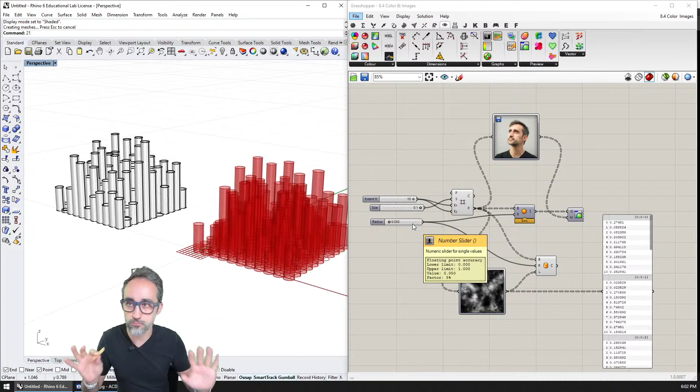Oh, sorry. I'm grabbing a snack. I haven't eaten in a long time. So, what am I going to do? We're going to record. Actually, this one doesn't need. Sorry, I'm just stuffing food in my mouth. Can you still hear me? Yeah. Sorry, I'm stuffing food in my mouth.

Give me 1 second. So first let me save this, and then let me close it, and then what we're going to do is... Okay. So what are we doing this afternoon again? We're streaming 3 times today. So I am going to do the 2 exercises that I'm missing that I want to wrap up for images, and then after that we're going to be done.

And then what I will do is offline I will prepare a small presentation, because tomorrow I want to record an introductory video like, hey, this is Introduction to Parametric Modeling. You're going to learn this and that. And for that I would like to have a video with small clips of interesting things that we did over the course of the playlist. So that is going to take me a little bit of time to prepare.

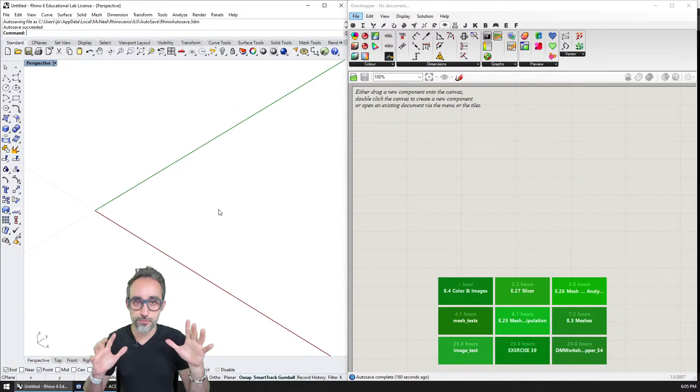Okay, so in the meantime, this afternoon, we are going to record the 2 videos that we have left, which is creating a pattern from an image. So that's going to be one thing. And the other one is going to be recreating a topography from an image. Okay, so how are we going to do that? I have the examples that I want to use here. Exactly. So, okay.

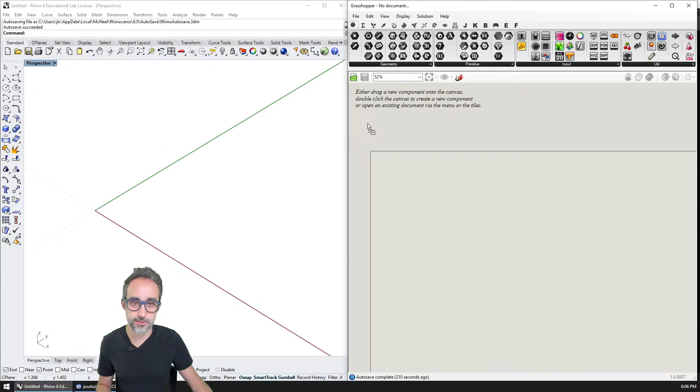All right, so for this one, I'm not even going to draw anything on the whiteboard because it's just going to be that easy. Okay. So let me put a slider here, and this is going to be grid size. That's going to be 10, for example, and then another. We're going to call this number of cells. Okay.

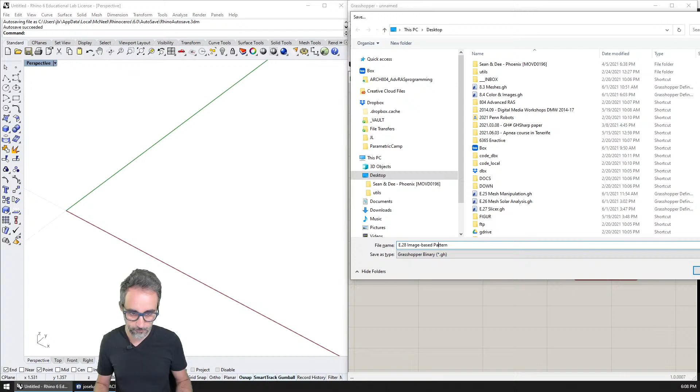E28 is going to be image based pattern. And then I will record the introduction later, but I'm going to start right away. Okay.

This exercise is going to be so easy that I'm not even going to do any sketching on the whiteboard. And you already saw in the introduction what the exercise is going to look like. So I'm just going to cut to the chase and start writing code. I have a couple of sliders here that I will use. And then I just dropped an image sampler from parameters, input, image sampler, which I'm going to extend to make a little bigger. Then I'm going to double click and load an image that I have here of myself.

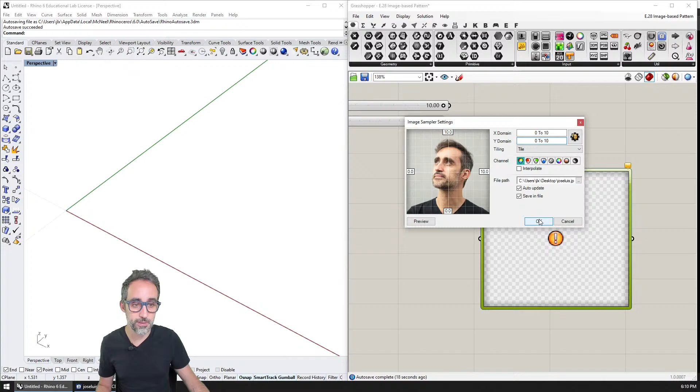Okay. In the previous video, we saw how by default the domain of the image is from 0 to 1. This I can change, so I can make it, for example, from 0 to 10, so that the image is a little bigger here on the Rhino viewport, if you will. And then what I can do as well is choose what it is that I want to output from the image sampler.

So right now we have RGB colors, but because I'm going to create patterns of circles that open bigger or smaller, I'm not going to use the RGB colors. I'm just going to use the intensity, so how bright a particular pixel is going to be. And this will be a value from 0 to 1, with 1 being super bright and 0 being not so bright. Okay.

You see that the image sampler turns black and white because that's a more accurate representation of brightness. Okay. And I'm going to plug in here a panel to get a sense of what's going on. Now, what I would like to do is create a grid of points that I'm going to use to sample this image. So I need to create a grid of points that go from 0, 0 to 10, 10 at however much intervals.

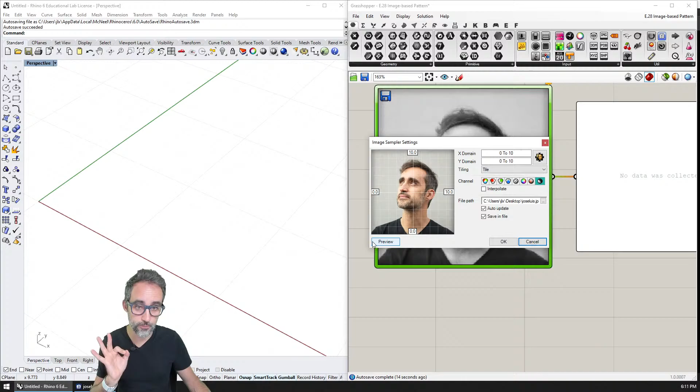And this is because the grid of points are going to be here physically in Rhino, but also it's important that those points have the same coordinate space as the image. So I'm going to create a grid of points that is going to be square. The base plane is going to be fine, and the size of the grid cell... how many points are on each direction will depend on my number of cells. So for example, I'm going to do 10.

And then the size of each cell will be equal to the size of the whole thing, which we agreed was going to be 10 units, divided by how many cells I have in each direction. So that's why I need to do a division where I divide the total size of the grid by the amount of elements, and that will give me the size of each one of the grid cells. And therefore, if I have more cells, they are smaller, but if I have less cells, they are bigger. Okay?

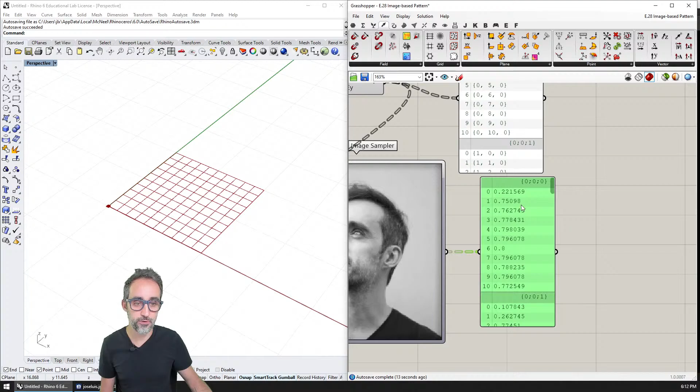Right, so now I have here a collection of points. Those points have coordinates in world coordinates, 0, 1, whatever. But I don't care about world coordinates. I care that the domain space of those points is going to be similar to the one in the image. So from 0 to 10, my image is also sampled from 0 to 10. And therefore, now each one of those points has a value for the brightness. You can see that some points have low brightness and other points have high brightness.

And what I can do now is use those values to drive the dimension of a particular element. So for example, I'm going to turn this off, and I can use those to drive the dimension of particular elements, for example, a circle. If I drop a circle here and I choose all these vertices as the centers, and all these radii as the diameters, you can see that something is happening.

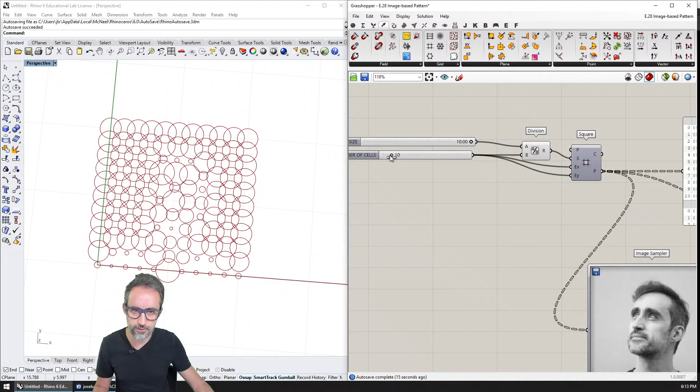I can see that more or less there is a sense of larger circles around and smaller circles here. And if I crank this up, it looks like there is some kind of pattern arising that looks like the image. So that is great, but because I'm using just the straight numbers 0 to 1 as the radii, this is not working entirely, because the circles should be smaller the more cells we have. So we need to multiply this 0 to 1 by the size of the cell so that the circle adapts to smaller cells or bigger cells.

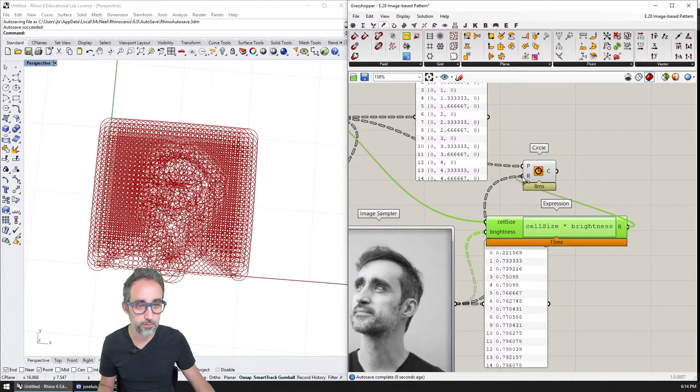So I'm going to add here an expression, and this is going to be cell size, and this is going to be brightness. The cell size is going to be here, and the brightness is going to be this one, and I'm just going to multiply the cell size by the brightness. As I plug this in here, it's starting to work, but you can see that there's overlaps. That's because we are using the radius, not the diameter. So we just need to multiply this by 0.5. And now we're getting something that looks much better.

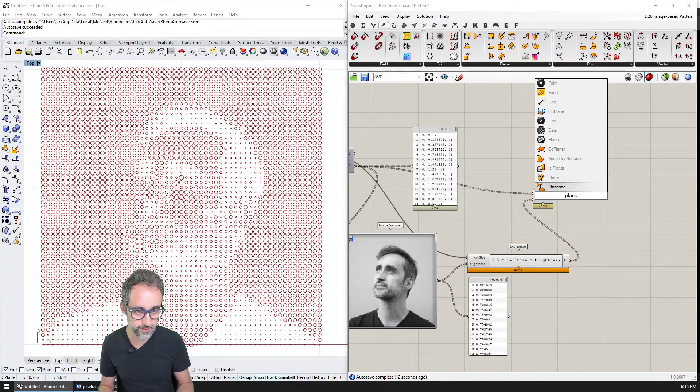All right. So we get larger circles where the area is brighter, and we get smaller circles where the area is dimmer, which could be a way to go as the pattern. And let me actually crank this up so that we have more definition. So this is starting to look pretty cool actually. But I would argue that if we do a planar surface, like a boundary surface, it's going to look even better. So it's going to look something like this, right?

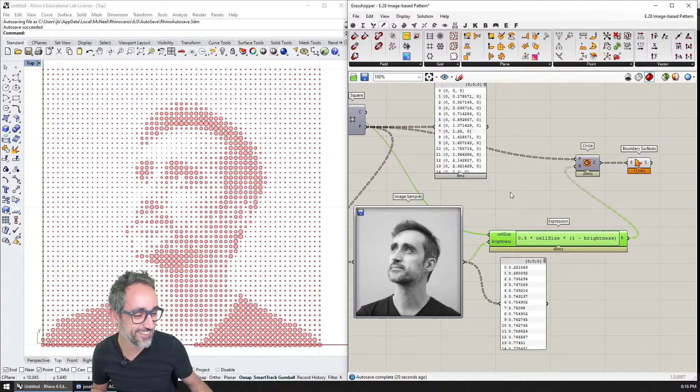However, I would argue that I kind of want the opposite effect. I want smaller circles where things are brighter, and I want bigger ones where the element is darker. So what we want is 1 minus the value of brightness, so that wherever we have a lot of brightness, the value is very small, and wherever we have tiny brightness, the value is bigger. And then I can do that, and you can see that now this is starting to look a little better.

By the way, I never gave credit. This image was taken by my friend Nono Martinez Alonso. So it's always good to give credit.

And something that I also want to try is to implement something where under a certain radius, under a certain size of pixels, we're just not going to take that into consideration. So if certain circles are smaller than a particular value, then just remove them completely from the list. Maybe I'm going to work directly here with the brightness. I'm going to take all the values for the brightness, and check if the value is over a particular threshold, or AKA, if the value is very, very bright.

So how do I do that? I can go to mathematical operators, and use a comparison operator that is called larger than. With larger than, I can compare if these values are larger than a particular value, for example, 0.9. The result of this is going to be a list of true and false values that tell me whether a particular number is greater or not. And with this list, I will be able to remove from this data tree any element that is false and keep any element that is true.

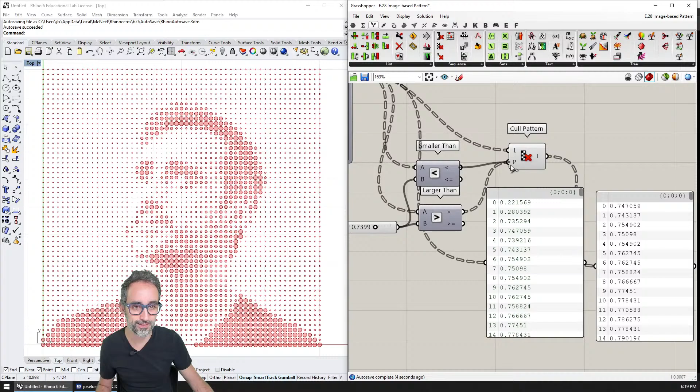So I'm going to use cull pattern, which we have seen before, where we take a list and the pattern used for culling, a list of true and false values, and then the component removes those values from the list. So I'm going to take the list of values and apply this pattern. And you can see that now what I have is only the values that are greater than this value. I actually want the opposite effect, the ones that are smaller. So I'm going to repeat this with the other operator. And now I have kept only the values that are smaller than a particular value.

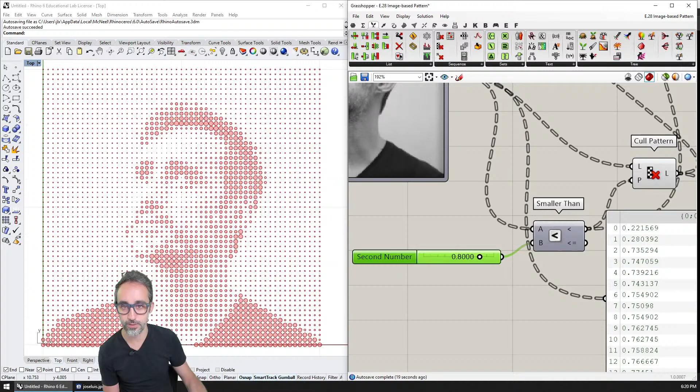And then as I plug this in here, oh no, what happened? We're having data problems here. So I need to cull not just the numbers, but also the points that I'm using as the baselines for the circles. And now you can see that the more I lift the limit, the more circles we get. And if I go all the way up, then I get all the circles. But if I go to, for example, 0.8, a lot of these bright values are starting to leave. You see?

And I could also create an animation with this, actually, but I'm going to leave that up to the user. So in case I didn't explain correctly, the problem that I was having was that I was trying to create circles with all the points on the grid, but I was giving it less values of brightness because I had culled the values of the brightness.

So what I have to do is take the list of points and cull it also, to remove the points from the list that have a small brightness, and then just draw the circles for the ones that have the large brightness. Okay? All right, and I think that's it. That's all I wanted to do for this exercise.

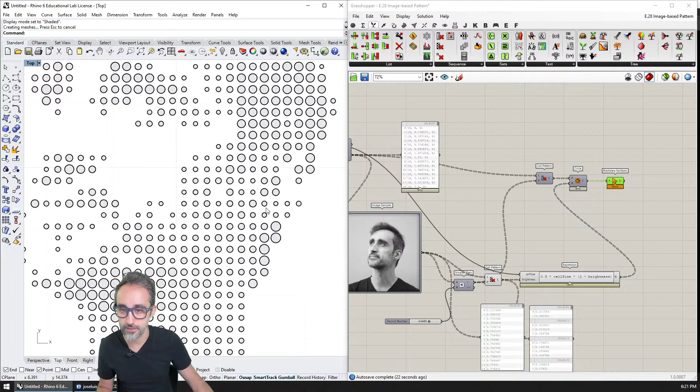Now I can bake this, for example. I can use it as surfaces, and then, I don't know, this is a shaded thing. I could use those circles for laser cutting. I could etch something. I could just put my face in the back of my laptop with a laser cutter. There's a lot of things you could do with this kind of patterns right now.

Okay. All right. So with that, I think we have completed the exercise. What was it? Like 7 components? This was really easy, actually, and very nice to work with.

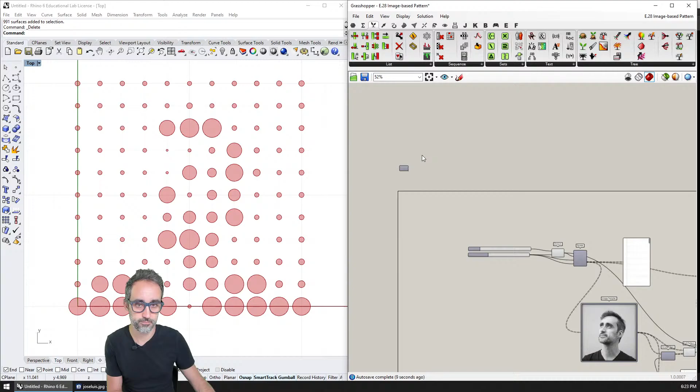Okay, and now I'm going to record the introduction to this video. Okay, we're going to put this here.

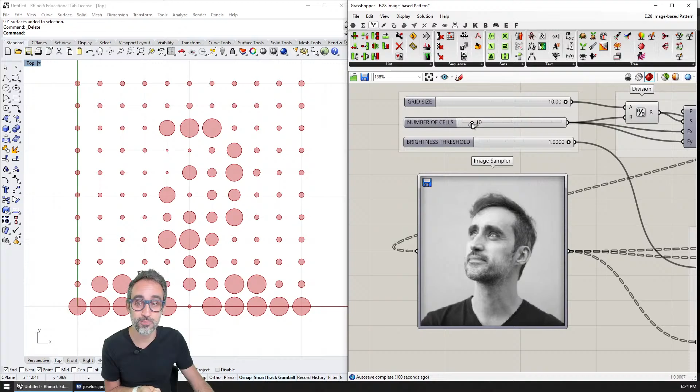In this one, I would like to make a super simple exercise where we're going to take an image and use the brightness of the pixels on that image as the values that are going to drive the diameter of all these circles, so that we will be able to generate kind of a representation of my face using circles that are bigger or smaller. And of course, everything is going to be parametric, so we're going to be able to increase the resolution of how many circles we're using to represent this image, so that it starts looking a little more defined, right?

And I will show you as well a technique to use conditional statements inside of Grasshopper to add or remove elements. So in this case, for example, I'm going to implement a kind of cutoff where we're going to be looking at a level of the brightness, and I'm going to be removing circles for those pixels that are under that value of the brightness.

This is going to be a super simple exercise. It's going to take us like 6 components to do, and it's going to be super nice because it could generate a pattern of circles that you could use, for example, for laser cutting or for etching or for creating stickers, or I don't know. That is absolutely up to you. Okay? But it's going to be super simple and super straightforward to do.

Let's get it done. And also, even if you don't want to learn how to do this, you can just take this file, replace your image there, and then just be done with it. You know, it's as simple as that. So let's get hands-on and let's get started.

You're right, Said. Or robot printing. Absolutely. That also works very well.

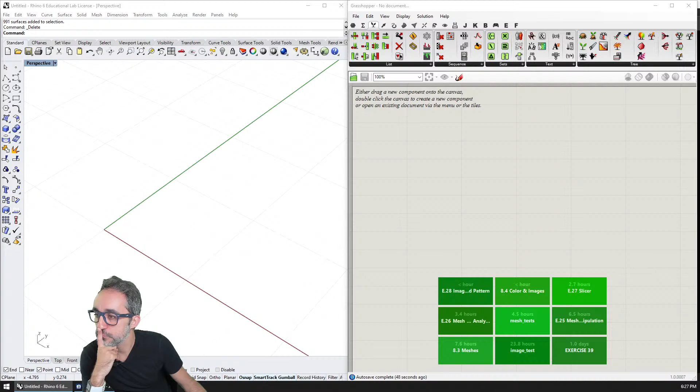Okay. All right. So the next exercise we're going to do is we're going to take an image. We're going to sample that image with a lot of points, and then we're going to move those points in 3D, and we're going to create a NURBS surface or a mesh with each one of them. Okay, and we're going to do both, and I will explain what advantages each one of them has.

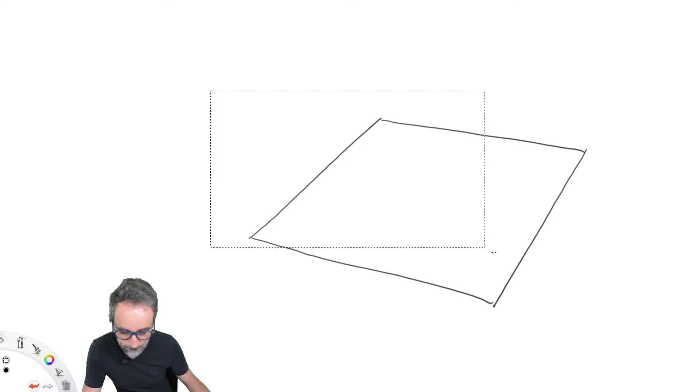So, how am I going to do this? It's going to be super easy, actually. So we're going to start with an image. Why am I drawing that so high? Actually, wait, I actually did like that one a lot. So, why can't we just... We're going to start with an image like this, exactly.

And then this is going to have an image like whatever. It's going to have whatever the image, blah, blah, blah. It's going to be whatever the shades, right? Whatever the shades is. And then what we're going to do now is we're just going to place a bunch of points on it. We're going to place a series of points on it.

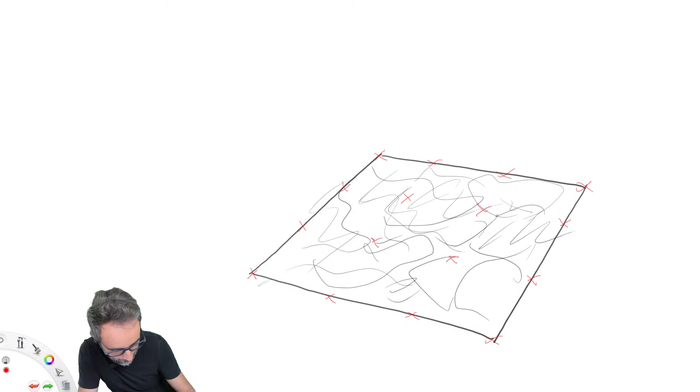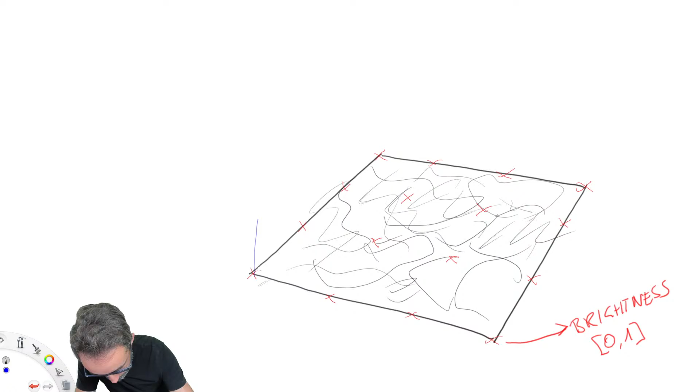Then for each one of those points, we're going to calculate the RGB values. Here, we're going to calculate the RGB values. And then we're going to use, no, sorry, not the RGB values. We're going to calculate the brightness, which is going to go from 0 to 1. And then we're going to use that to move the points. Oops. We're going to use that to move the points up a controlled amount.

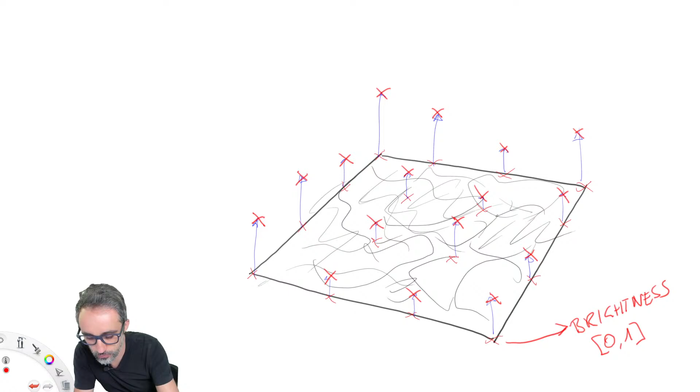And then once we have that, we are going to create a new mesh. Oops, not that one. And then this. That mesh is going to be... I don't need that. I don't need that.

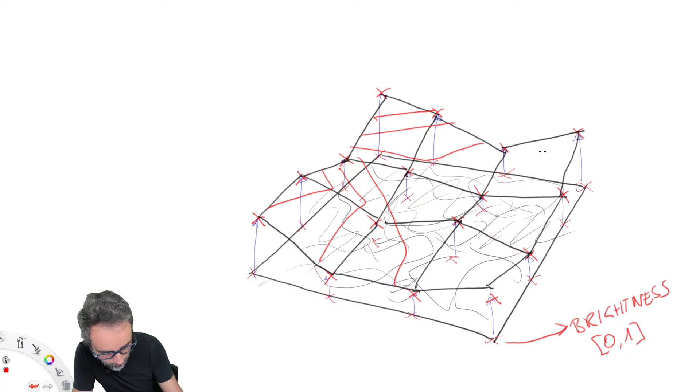And then after we have that, what we will do is we will do the typical thing where we create a vertical set of planes. I can explain that. So we can do that. And then we will want... it doesn't look terrible, right? Okay. All right, so let's do this.

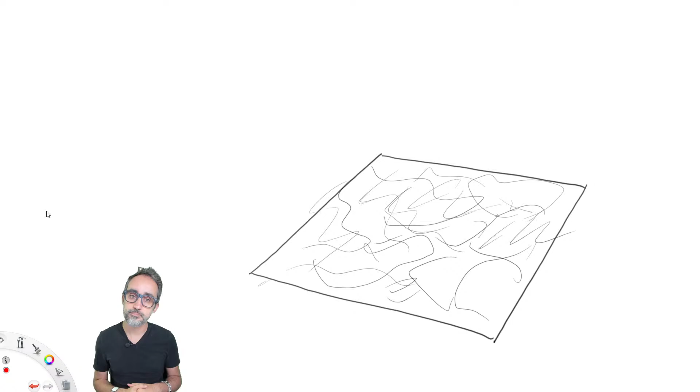This exercise is going to be super simple and super easy as well, because it's going to be just basically mixing everything that we know how to do at this point. So we're going to start imagining that we have an image, and that image has some kind of grayscale tones to it that represent how high a particular terrain is. And then given that, it's going to be as simple as we have done in the previous exercises, where we're going to basically sample that image with a grid of points.

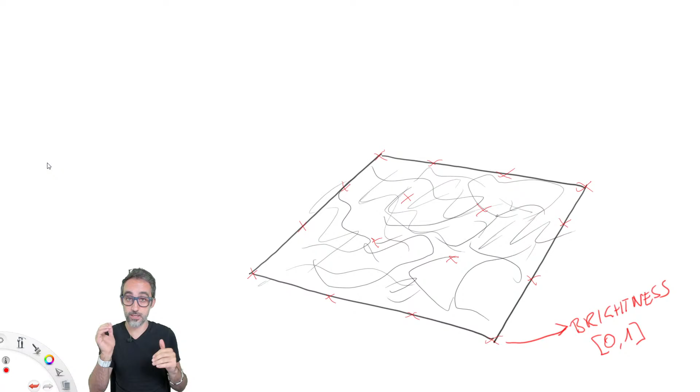For each one of those points, we're going to fetch the brightness of the image as a value that is inside of the range from 0 to 1, so 1 being very bright and 0 being not so bright. And then we're going to take all those points and we're going to move them in Z at a value that is going to be a factor of that brightness. So, I don't know, 5 times the brightness, 10 times the brightness, however much the scale of the terrain we want that to be. That will give us a cloud of points that are now in 3D space.

And then if we reconstruct them with a mesh, we will get a mesh in 3 dimensions, with each one of the points representing the height of the terrain. After that, we will just do a very simple operation like we have done before. We will generate a set of parallel planes in Z, and then we will cut the mesh with those planes in order to create the contour lines of this terrain or of this landscape.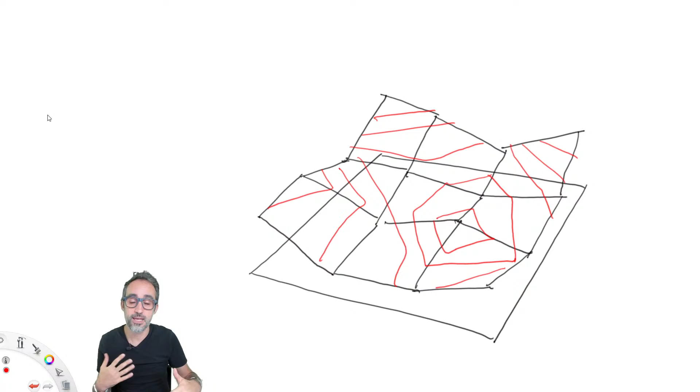And maybe, I don't know yet, but maybe after that, because these contour lines are going to be in 3D space, they're going to have different heights. Maybe something that we could do is we could project them all together to the XY plane in case we need to print them as a map or something like that.

One thing that I would like to do is I would like to do this exercise reconstructing a mesh, but I would also like to make this exercise reconstructing a NURBS surface instead. And I would like to do that because you will see that the quality of how the contour lines are going to come up is going to be very different, but also the performance of the algorithm is going to be very different. So depending on what we want to do with those ISO curves, we will choose one method or the other. But I'm going to provide both options for you to choose and for you to learn more as well. So let's get hands-on. Let's go back to Grasshopper.

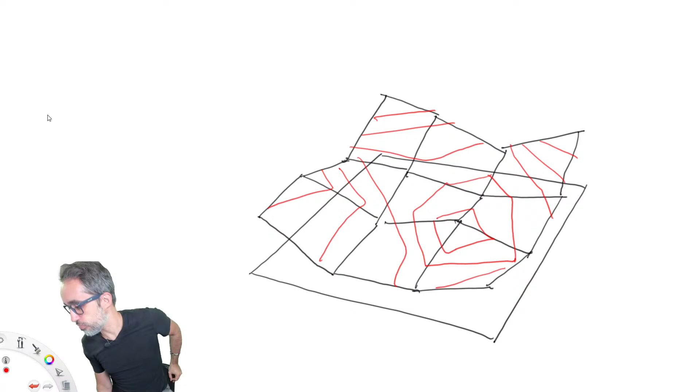All right. Okay. Okay, so I'm going to have that. Oh, image sampler. Okay.

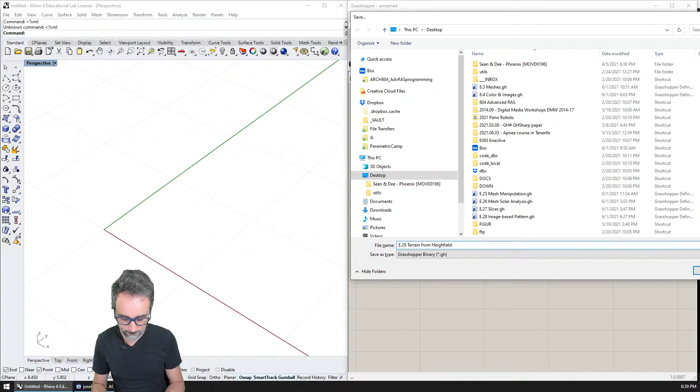Yeah, I don't need a Rhino file for that. Okay, let's get started then.

The first thing we're going to do is load the image that I want to bring in. So I'm going to go to parameters, input, and drop my image sampler here. Then I'm going to double click on the image sampler and find on my computer this file that I have, called the height field from TerraGen. This is a file that I downloaded from Wikipedia.

Let me hold on. Let me find that.

Yes, exactly. If you Google height map Wikipedia, it's literally the first image that shows up, generated with a computer, with TerraGen, which is software for generating terrains, and it's actually really, really nice. I've used it in the past.

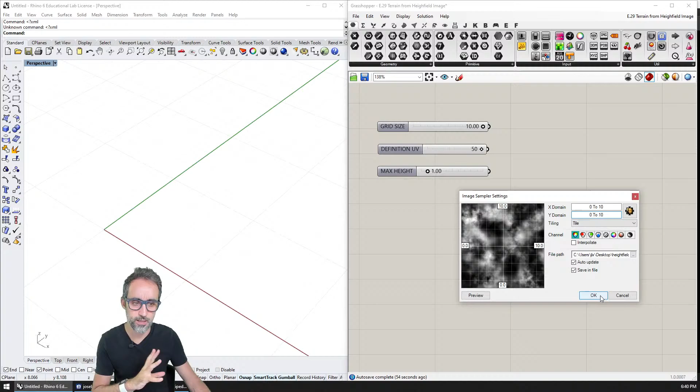So I'm going to use that, and I'm going to scale the domain up a little bit from 0 to 10 so that the image is a little larger here in the Rhino space. Then what I'd like to do, as I've done before, is generate a grid of points to sample the image.

Now, for reasons I'll explain very soon, in this case I am not going to generate that grid by creating a square grid like I've done in previous examples. Instead, I'm going to create a flat planar mesh that has a controlled amount of squares in the U and V direction, and it's that mesh I'll deconstruct to obtain the vertices I'll use for sampling.

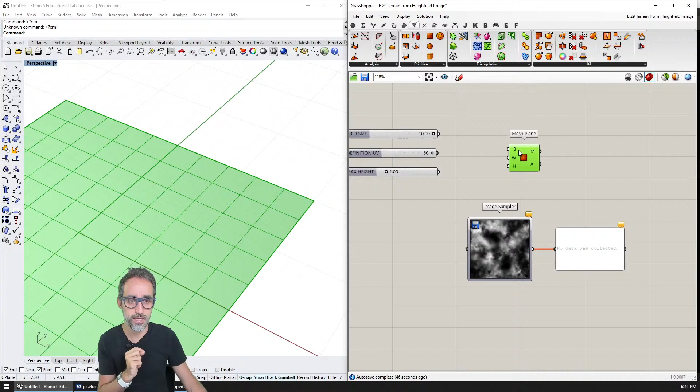So I'm going to go to meshes, primitives, and go for mesh plane. As I do mesh plane, you can see the boundary is going to be the rectangle that describes the boundary of this surface. For that, I'll need to create an actual rectangle.

So let me create a rectangle centered on xy, with x being 10 units and y being another 10 units. This takes a domain, but I'm just going to give it one number, and I'll get a rectangle that is this big, which I'll use for the boundary.

Then how many faces along the x and how many along the y is defined by this other parameter I have, and it's going to be the same in both directions because the image is a square. So with that, I've created a mesh that contains all these vertices and all these faces, which is great.

If I deconstruct such a mesh, what I'll get is a grid of vertices that are equally spaced. So in a way, it's a very similar process to what I did in previous examples with the grid—it's just that we're going to start with the mesh instead. This will have advantages that you'll see very soon.

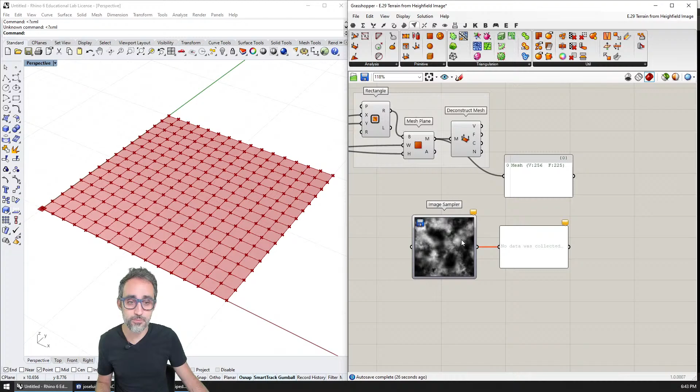Now that I've created my mesh, I'm ready to sample each one of the vertices with the image. What you can see is that the image is giving me RGB colors because I forgot to tell the image sampler that I only want the brightness. So I'm going to click on brightness, and now I get values from 0 to 1.

Then, in order to recreate the mesh, all the points I had below, I'm just going to move them up in the Z direction, an amount directly proportional to how bright those pixels are. We know that from the data. So the only thing I need to do is, for example, let's say I create directly a Z vector with these values, right?

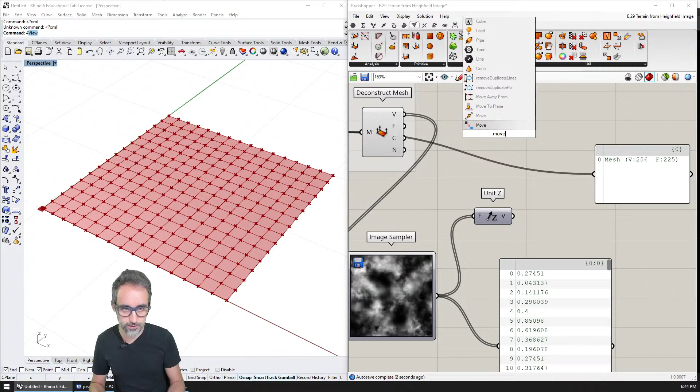So if I do that, then I can now move all those vertices in Z that amount. And you can see that I already start getting an effect where some points are going higher, some points are going not so high. Which is, it's starting to be pretty nice.

I'm going to leave the mesh there. What I would like to do now, with these points that are above the mesh and have been modified by the height field or height map, is create a new mesh that has its vertices moved in 3D space with this logic. So the only thing I need to do is go to primitives and click on construct mesh. Construct mesh requires all the raw information a mesh needs to be created, which is a list of vertices - those will be the vertices I just created - and a list of faces.

Needing a list of faces is the exact reason why I chose to create the grid of points from a mesh in this case. Because I created a flat mesh that already had the information for the connectivity of the faces - all the quad faces and all the indices - this information would have been pretty difficult to recreate in order to make this mesh now. So because I already have it here, and because the topology stays the same, the same points are going to be joined with the same points. I've just moved them in Z height, but they'll still be connected with the same quads.

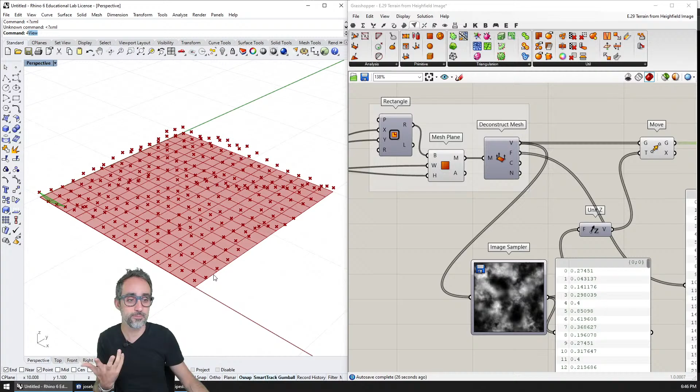So that's why I can reuse this information - it's going to come in very handy to just plug in here directly. And if I turn off the base plane, you can see very nicely that I have this mesh now resembling this topography. Is that so? Let me crank this up. I'm going to do 50 and turn off the points.

Is this topography kind of looking like this? It looks like this area is more depressed, this area is more like a ridge here, right? It looks like there's some mountains here, which kind of fits this. And this area is also higher, so this area is also higher here. Ta-da! This looks like it's working.

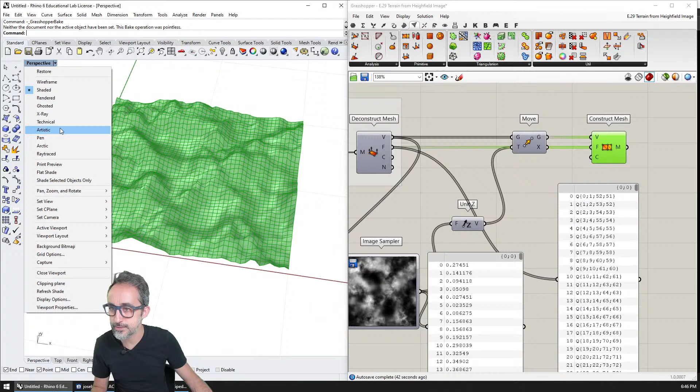And if I bake it, and I do, for example, like an eye-level render kind of view of this - oops, sorry - you can see that this mesh is kind of looking like this one here. So that's great. So what was that? Five components that we used to generate a mesh with volume out of an image. I think that's pretty badass, if you ask me. Not because I did it, but just because, you know, I actually think it's pretty cool.

I want to factor the height, and I also want to give color to the mesh.

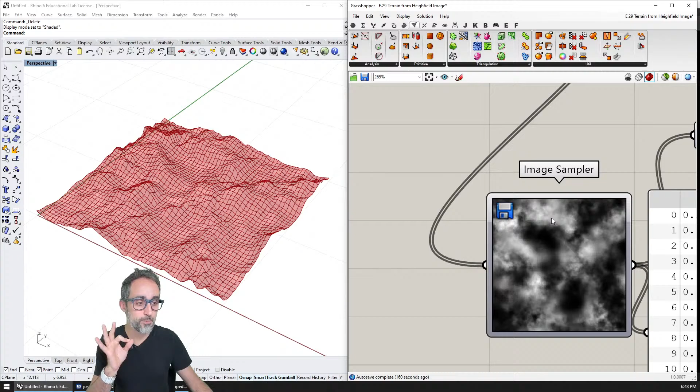One detail we skipped over, we tiptoed over, was the fact that I used the values of the brightness right away straight, so the maximum height of each of these points is going to be 1. Maybe that's not what I want, because maybe I know how much a pure white value for this particular image represents, for example, 3,000 meters, if it's a mountain or whatever. So I would like to factor this height by a value, so that if I know the pixel with maximum brightness is 3,000 meters, I can set 3,000 meters here, and that will scale the whole terrain accordingly.

So that's just going to be a simple multiplication operation, taking each of these values and multiplying it by a factor, then using that as the Z value. With this, I now have a way to control the overall proportion - either absolutely flat, or it starts growing into a serious topography with serious mountains, right? So maybe we like something more like this, I don't know. That's one thing.

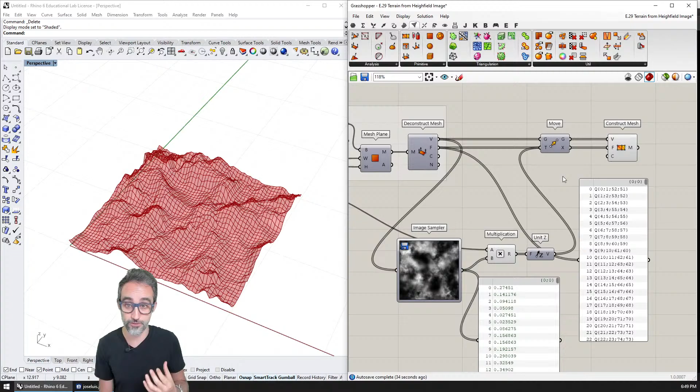The other thing is, we are using meshes, and we know that meshes give us the opportunity to color them, because they let us add vertex colors to each vertex. Since we have the mesh, why not use this image also as a texture? So when I construct the mesh, remember I can plug in vertex colors. I can use the exact same image sampler, but copy and paste it.

But now, instead of using the brightness value, I'm going to take the RGB colors, so that I have a full RGB spectrum here. Because if I plug this in right away, I'm going to get errors, that's for sure.

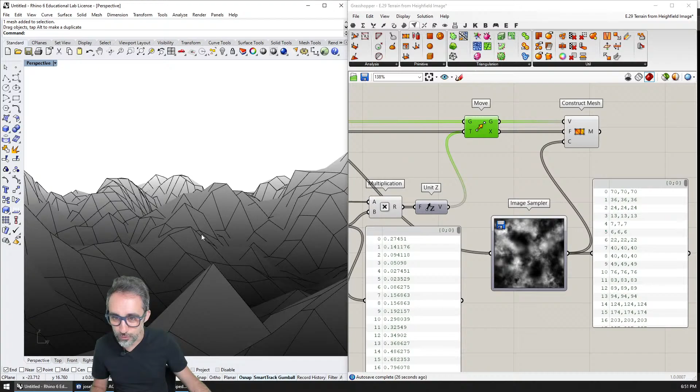That's why I need to do another sampling operation, taking full colors instead. If I plug this in now, you can see my mesh actually has the ridges and valleys colored specifically according to its height. So I'm going to bake this now, and as I do, you can see the higher points are white and the lower ones are black, which is kind of cool, right? You can imagine a fly-through here. How cool is this, huh?

Okay, and the last thing I'd like to do with this mesh is slice it with a lot of parallel planes in order to get the isocurves that define the height of these meshes, in a similar way as we have in maps. So let's take a look at how we could do that.

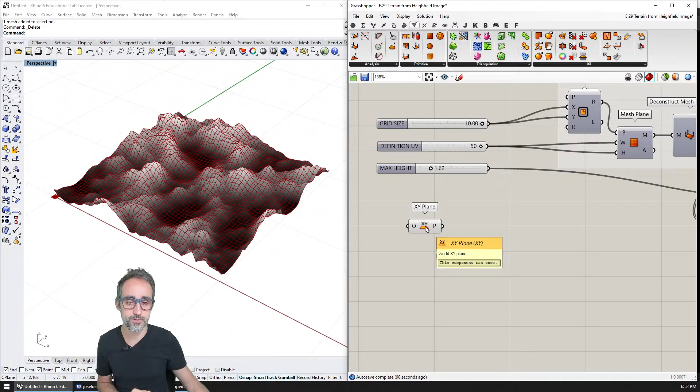As we've seen before, we could use the method of the bounding box and planes, but I'm just going to keep it simple. I'll create a simple XY plane starting at 0, and add a couple of parameters, for example a value for iso curve height - how far apart the isocurves are - and I'll set this to a fairly small value, 0.1.

And another parameter, number of isocurves, set to 100, for example. With this, I'm going to copy this plane 100 times, at a distance controlled by this height value. So I'll create a series of numbers starting at 0, where the step size is how far apart the isocurves are, and the amount of values is how many isocurves I have. That gives me a series of numbers that looks something like that.

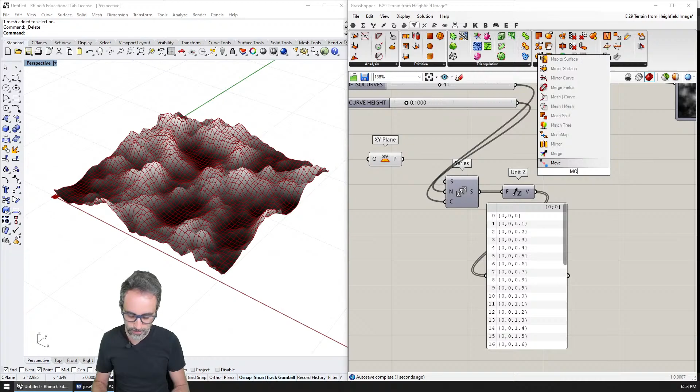If I now use that to create vectors, I can use those to move the original XY plane, creating a collection of planes in 3D space, which I can use as the cutting planes for this mesh.

So I'll take all these planes, move this logic somewhere, and then take this mesh and section it by all these planes. This is very similar to what we did in the previous exercise with slicing. I'll go to intersection, mathematical, and use mesh versus plane, taking this mesh and cutting it by all these planes.

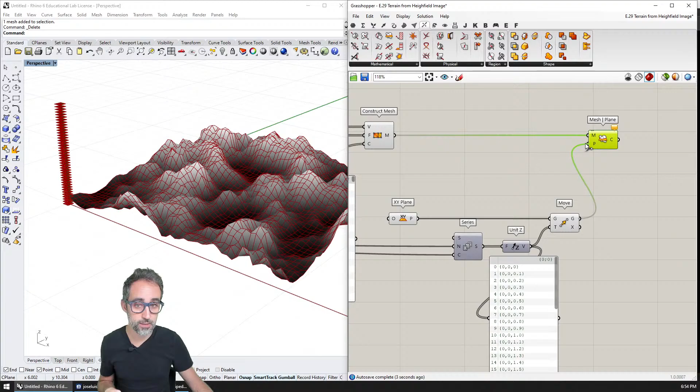Whoa, nice, check that out. Let me hide the planes - how cool is that, right? So now we have my image from the previous exercise, we have the terrain, which is a mesh, the terrain has been colored, and we have all the isocurves, which pretty much look like a plan, like a map, right?

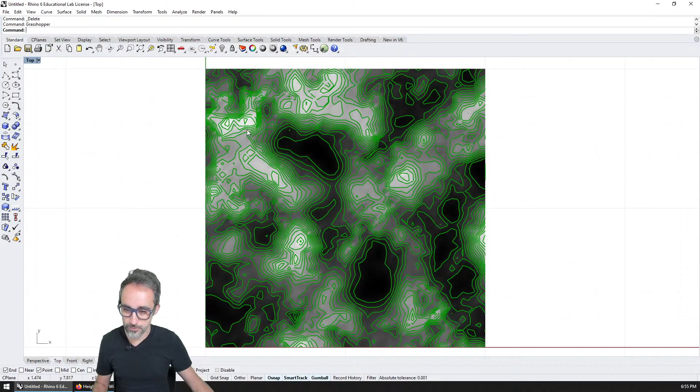And if I actually turn off the preview mesh edges, now you can see how we have kind of grouped similar colors with these cutting planes, and then you see all this black area, and these white tips here, and this is looking really, really cool actually.

And of course, this is parametric, so I'm just going to move this to my other screen, and I can add less height between the curves. I can have more curves, etc. But I can do, for example, 0.05, and this is going to look very, very nice. Okay. All right. This is great. Now it's looking pretty good.

Now, what do we want to do now? The last thing that I would like to do is take all of this and project them to the XY plane so that in case we need to laser cut them or plot them or print them, they are all on the same plane and it makes things a little easier. We could also color them by height, actually. That could be interesting to do. But anyway, let's do that first.

So what I'm going to do is go back and dock my Grasshopper here, and I'm going to take all the curves and just project them onto a plane. So I'm going to take all this geometry and project that geometry to an XY plane.

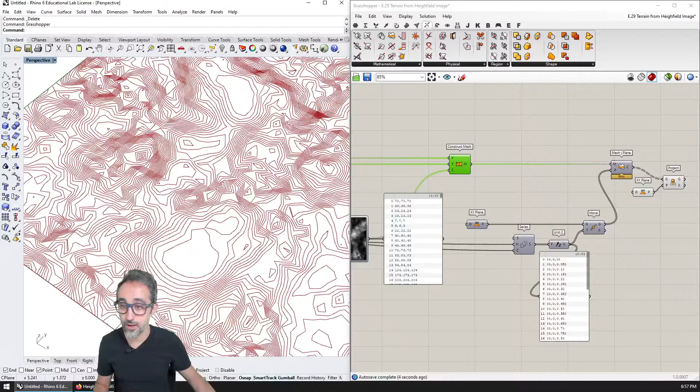And if I hide that, and if I hide that, you can see that I have now created this projection that is planar, but it's on the XY plane and would allow me to print and do whatever I want with this. Can you see? All right, so this is great. It's looking great. However, however what?

However what? What do I want to do now? What do I want to do with this now? Oh, I wanted to say that the projection is part of the transformations. So I want to say that now it's a transformation. And then what I want to do is, yes. Yeah, okay.

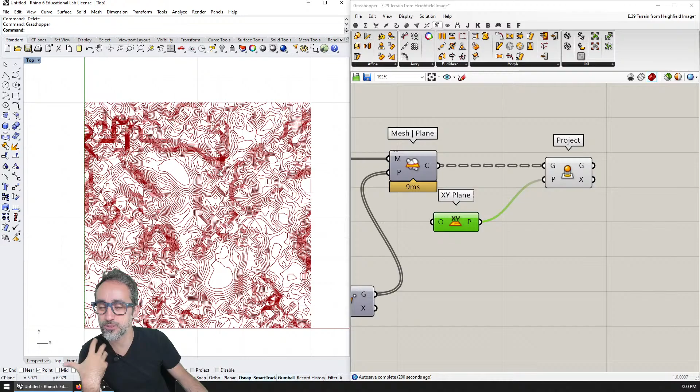So I may want, for example, to smooth out these curves. I may want to create curves that are actually curved and that transition smoothly between all these points of the polyline, so that the curves look a bit more natural, because terrain is not just triangles in 3D space. Terrain is typically made out of curves. So how could we smooth these isocurves in a way that makes them feel a bit more natural?

I see two ways around this. One could be the quick and dirty, which is taking these polygons and then, for each one of these polygons, creating a curve that is interpolated on each one of the vertices that forms that polygon. So if I have 4 points and I trace an interpolated curve between them, then I may end up with something that is a bit more natural. That's actually fairly easy to do.

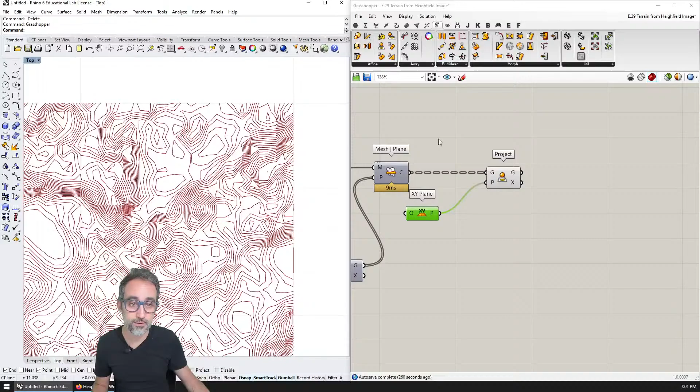Here, for example, if I take all the polylines that I have projected, and I can do this on the projected ones or on the ones in 3D space, it doesn't matter. But I can take the polygons that I have projected to the floor, and then I can explode each one of the polygons to obtain the vertices. So I'm going to explode them and obtain all the vertices for each one of the sections, for each one of the polylines.

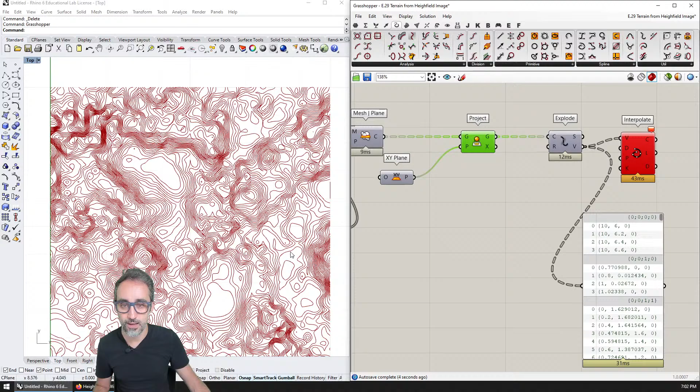And as I do that, what I can do now is take each one of those lists of vertices, which are very conveniently organized in branches, and then I can just pass that by an interpolated curve, and the result will be something like this. So if I overlap, you can see how from this polygon now I have this kind of curve going on, and from this polygon I have this curve here as well. So it looks like it's doing its job. It's working pretty well.

However, the problem with this approach is, well, it's not very exact, but honestly, given the whole process that we have followed, I don't think that any process will be very exact. But my main concern is that in areas where there's a lot of density of polygons, some of the curves are going to overlap with each other. For example, this is happening here because they are so close to each other, and this line is so big that the interpolation algorithm tries to smooth out, and it actually overlaps on top of the next one.

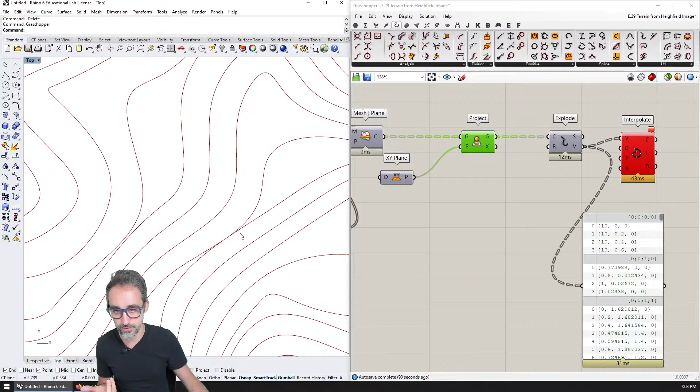This, to me, is actually a big problem because this is very strictly wrong. If you're doing a map that has isocurves that represent differences in height, then having these curves overlapped is a tremendous mistake because it just cannot happen physically. So I'm going to propose an alternative method, which is the cleaner parametric method. You see it's happening here and here as well, and here, yes, we have another overlap. So I'm going to propose the following.

Instead of creating curves that come from the polygons that we generate from cutting the mesh, which is kind of dirty, instead of creating a mesh in 3D space, which is very nice for representation, for the sectioning what we can create is an actual NURBS surface that is already infinitely smooth. And then it is that smooth surface that we create from the terrain that we section with the planes, and it's already going to give us smooth curves for this process. So how would we do that?

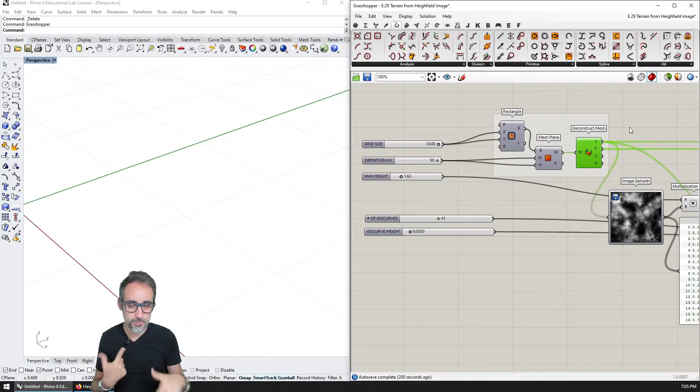Well, let's go back a few steps to where we created the planar mesh that we then decomposed into all these points, and then we created another family of points that define the topography of the terrain. At this point, what we did was we reconstructed a mesh so that we could have some kind of geometry to see that form, and also because it was very nice to have the colors projected on the mesh. Don't get me wrong, that's actually pretty cool. But there are actually ways that we can use these points to recreate an actual NURBS surface.

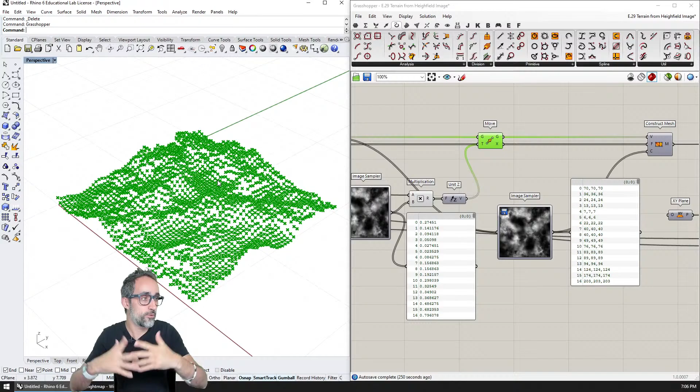And this is because it turns out that these points actually do have, as opposed to meshes that come from, for example, 3D scanning or other processes that are more involved with nature... But if you look at this, these points, even the modified ones, have a fairly clean-cut logic, which is that they are laid out in XY with a particular direction of U and V.

So it turns out that there are ways of reconstructing surfaces from a cloud of UV points that are nicely laid out in 2 dimensions like these ones, and then create a NURBS surface out of that. The way we can do that is if we go to Surface, and if we go to, where is that? To Freeform, you can actually see that I can create a surface. One of the options is to create a surface from a grid of points.

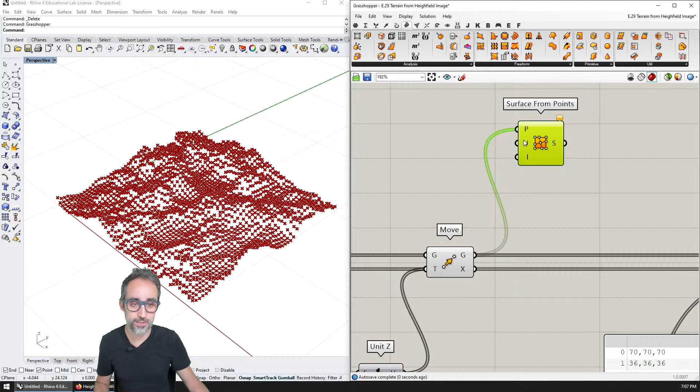So I'm going to place this here and let's take a look at what the component is asking me. It asks me for the grid of points, the number of points in the U direction, and whether I want to interpolate samples or not. So I'm going to give the points here and you can see that all the points are on the same list because of the double wire, but also if I look here, there are no branches, everything is on the same list. So that's a good thing.

And then U is going to be the number of points in the U direction. We know that we divided the mesh in this many U points. So I'm going to plug this in here and it did not work. It did not work because I made a tiny mistake, which is that we need to always read the fine print, okay? The fine print is that U is asking me for the number of points in the U direction.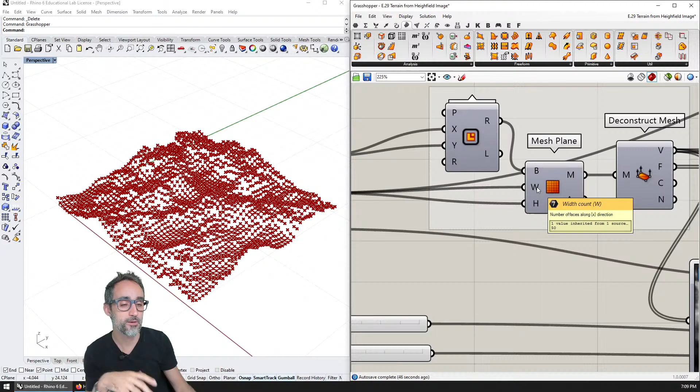Whereas what I have done here is that 50, I have used it to define the number of faces in the X direction. And as we have seen in previous exercises, when I divide something in 3, 4, 5 spans, what I end up getting is 4, 5, or 6 points, or 1 more point than the amount of divisions. So what I need to do is just a simple rule here, I'm going to take this off, I'm going to add here the number 1, and then boom.

And as I do that, you can see that now I have this thing, let me bake this to make sure that it's a surface. I'm going to bake this and I'm going to move it all the way here. And you can see that, what? It's actually a real NURBS surface. If I click on it, it kind of looks like a mesh, but you can see that it's not triangles, that each one of the edges is actually a tiny curve. So these are basically the isocurves of the surface, but they are not really faces.

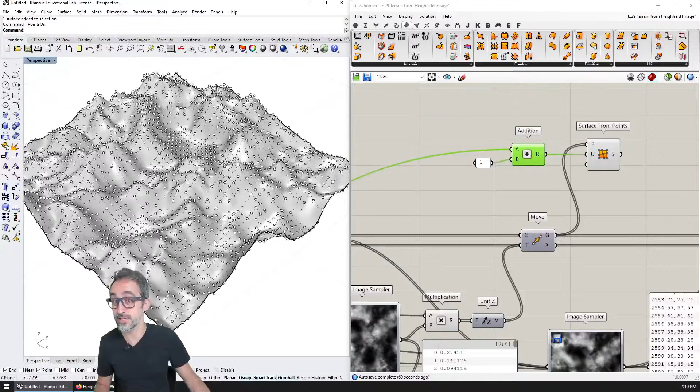So this is an actual NURBS surface, albeit one with a lot of definition and where the polynomial is probably crazy to figure out, right? But yes, so that works. And if I actually press F10, you can see how many control points this surface has. This surface is probably really heavy in memory right now. Anyway, so what I can do now is use this surface that I just created to subdivide it with all these planes that I just created here.

So how am I going to do that? I'm going to section it with a mathematical intersection that is going to be Brep and planes. So I'm going to place that here. The Brep is going to be the surface that I just got, and the planes are going to be, if you remember, all those vertical planes that I created for sectioning. So I'm going to use those.

I'm going to plug them in here, and you can compare how much more expensive it is to perform these sections than doing it with meshes. Meshes and mesh geometry, in a way, are very computationally lightweight. NURBS operations and intersections are way more complicated, more computationally intense, always.

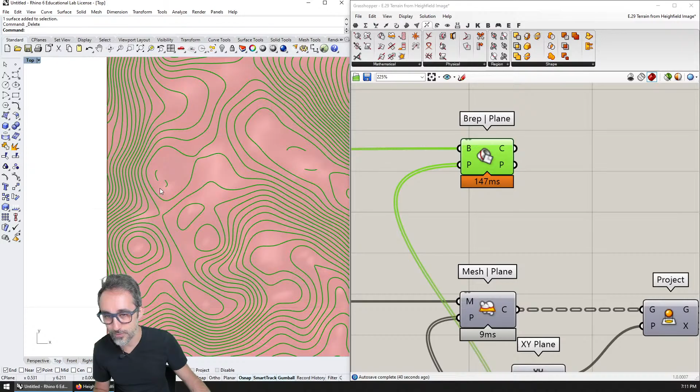But if we look closely enough, you can see that the intersections are now very nice and very clean, smooth curves. And if I look from the top, you can see that it looks way more natural than the situation that I had before. And of course, if I now project this to the XY plane, what I will get is this other form of height fields. So all these other isocurves that look way better than what I had before.

So I had this, remember, the green is what I did from the polyline, and the red is what I just got from the NURBS surface. So you can see I'm not getting kinks, I'm not getting this weird pointy here, I'm not getting the crazy overlaps that I was getting here. Look at the difference in the shape, right? So how much nicer this is than the other.

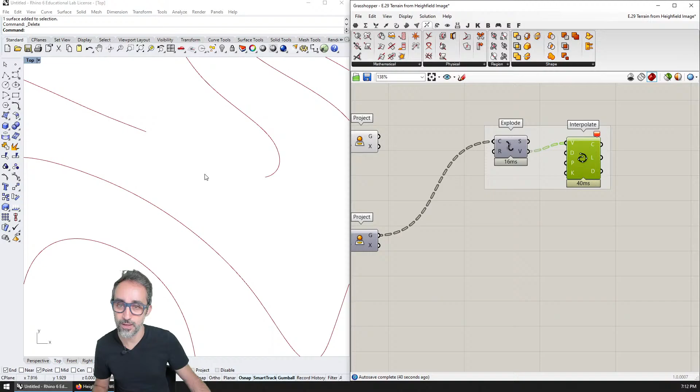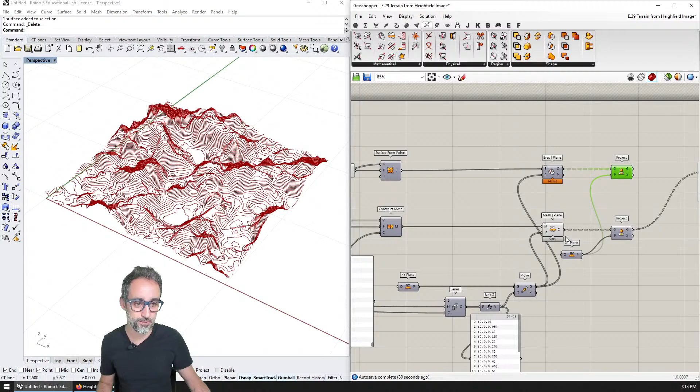But I think with this, we are ready now to just send this to printing or send this to, I don't know. Where do we send this? Now, those are the pros. For the case of the isocurves, NURBS surface is a much better approach. For the sake of 3D visualization and the coloring of the meshes, perhaps meshes are the way to go. I think at this point it's up to you.

And I think that's everything that I wanted to do for this exercise. Anything else that I'm forgetting? I don't think so. So if that's the case, then I think we're done with this exercise.

This was reconstructing terrains from height maps or height fields, and we used two techniques, mesh reconstruction and NURBS surface reconstruction. I hope this was useful, and I hope you now take some images from the internet or some maps and try to recreate them in 3D. It's a lot of fun. You could also 3D print this mesh, even with the color, and that would be really cool.

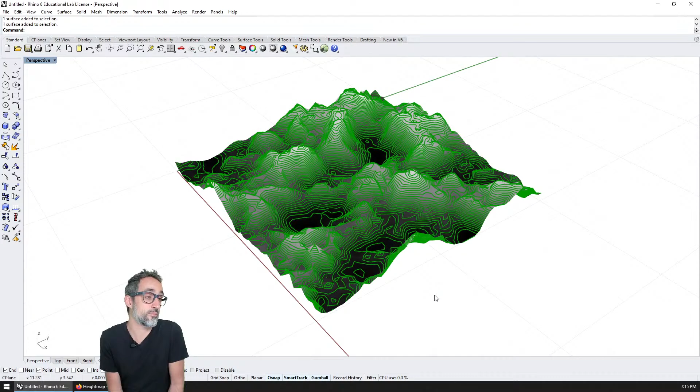Oliver, yes, you can use the same points and sample many different images and then take whatever results you get from those samplings and add them together, average them, whatever. It's absolutely fine. You cannot do it on the same component, so you cannot load several images on this one, but you can do one and then another one and use different images for each one. Perfectly fine.

So let me reorganize all of this stuff a little bit. That's going to be one thing. That is going to be another thing. This is going to be the generation of the planes. This is going to be the surface.

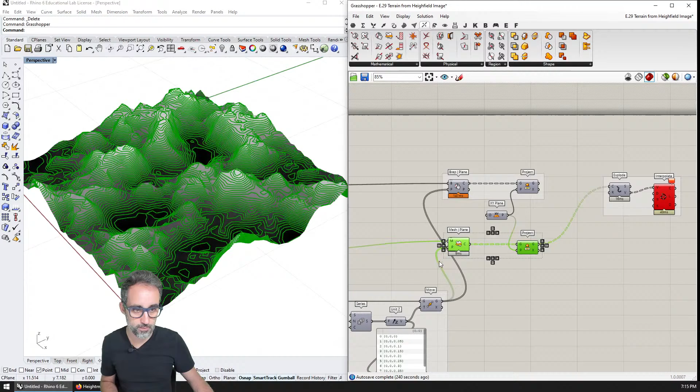How can I reconstruct the topographical surface from contour lines? That is a pretty good question because it's not a simple one. That is much more difficult to do, which actually could be a super interesting algorithmic modeling challenge. I'm going to write this down as a challenge. Ideas for next streams: reconstruct a topography from isocurves.

Well, it can be done. It's just not straightforward. It takes a little bit of calculations, but it can be done, especially if you already know the heights of the curves. Now I've written it in my ideas, and that's going to be an exercise that is perfectly doable with Grasshopper. So I got you. Don't worry.

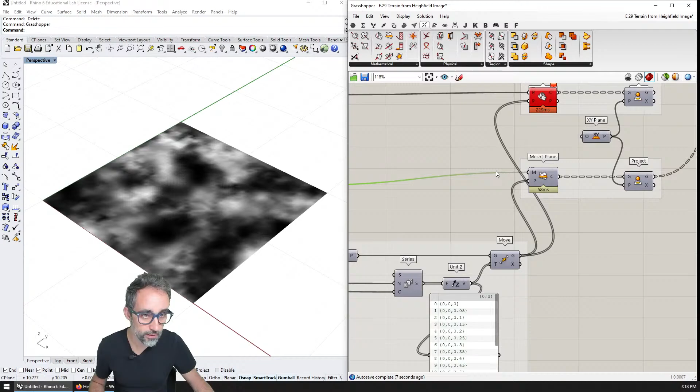Okay, I need to record the intro video. What am I going to say? I'm going to say that given an image, I would like to reconstruct a mesh that is going to look like that, where the height... and then from there I would like to show the sections and project them.

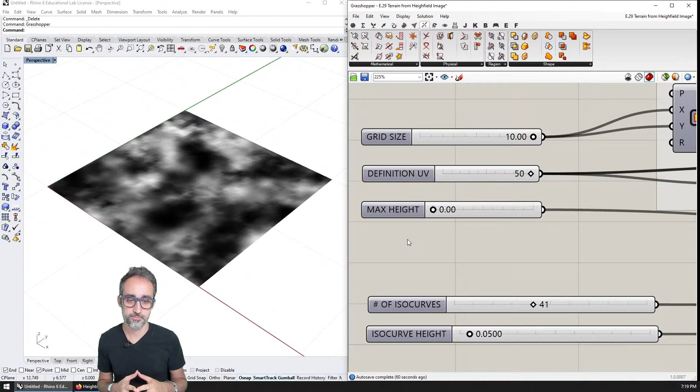In this video, I would like to make a super fun hands-on exercise, which is going to be how to reconstruct a terrain from an image of a height field. So imagine we have an image which is grayscale and represents how high or how low certain areas of the terrain are. We can actually reconstruct geometry with that volume, for example, by creating meshes or creating NURBS surfaces out of that. So for example, here I'm going to start increasing this mesh which I had flattened, but I'm going to start factoring it based on the image map that I have previously loaded into Grasshopper.

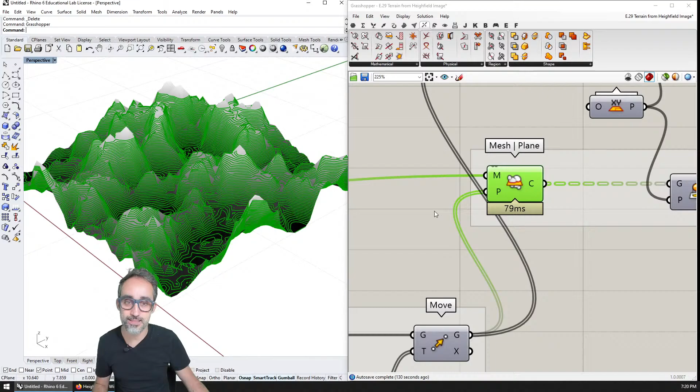And then at the same time, something that is going to be super easy to do is to create isocurves, or to create all the curves that are the intersections with horizontal planes, and therefore be able to create this kind of image that we will be able to project, which is going to be the height field. So the isocurves as if it was a map. Now we're going to do this with meshes because it's very interesting, it looks 3D, but for the isocurves part, the definition of the curves are not going to be great.

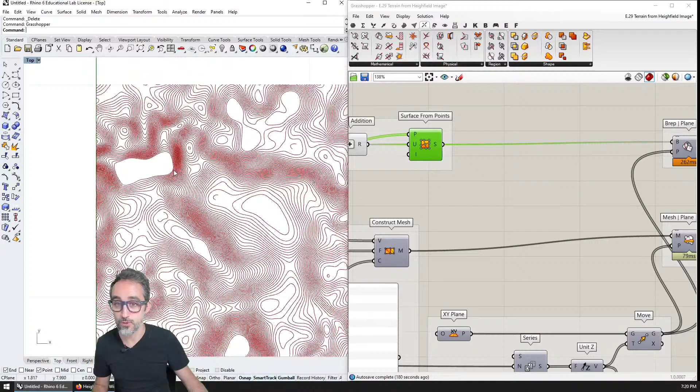So for that, I'm actually going to switch to creating this terrain also with a NURBS surface, so that when I do the intersection, the curves are much smoother and they look way more natural, because we're not cutting triangles, we're cutting an actual NURBS surface. And therefore, when I project that to the XY plane, it looks like a real topographical map, which is going to be super interesting. Okay?

It's going to be a fairly simple exercise. It's barely 12 or 15 components, but it's more about the ideas that we're going to explore here that I would like to emphasize. Okay? So this is going to be really cool, especially if you're into landscape or video gaming or those kind of things. So bear with me, and let's first do some sketching and some diagramming to think through how we are going to approach this problem. Let's do this.

Yoo-hoo! Whew. I think we're done. We are done. God, that was a lot. Oh my God. Sorry.